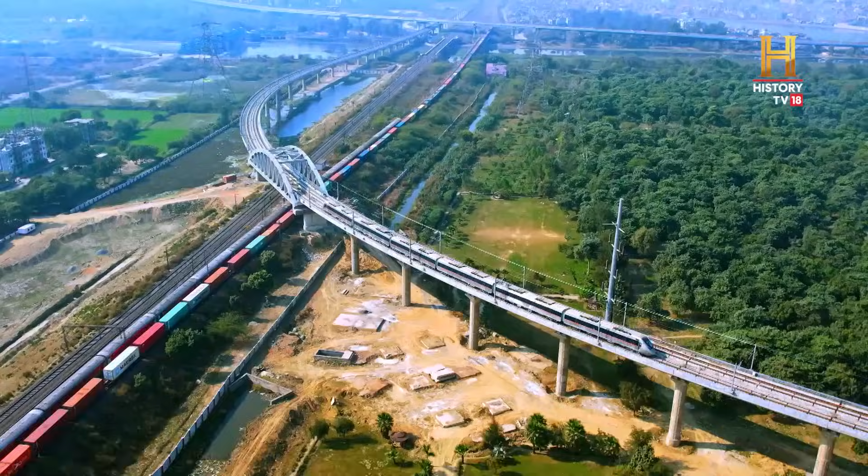India's first semi-high-speed regional rapid transit system, with a design speed of 180 kilometers per hour. An engineering spectacle passing through the densely populated national capital region, featuring world-class technology, new-age train sets, and a vision to modernize the way India travels.

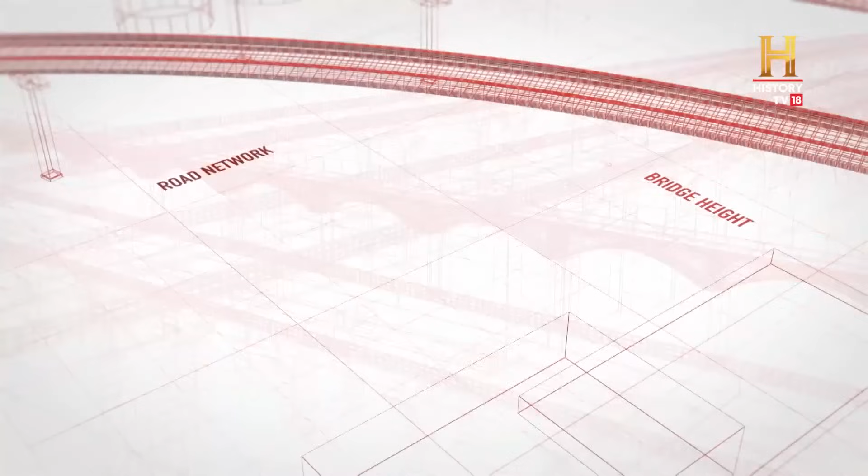Delhi, India's capital city. Standing in the heart of NCR, Delhi is a vibrant melting pot of dreams and growing aspirations.

This means that citizens from neighboring regions not only take up a tiring daily commute to the epicenter, but many have taken up residence here, swiftly adding to the congestion. The National Capital Region has a population of 46 million as per Census 2011 and is projected to become the most populous mega region in the world soon.

Can the region and the capital city handle the pressure of this escalating growth?

The idea of a National Capital Region was born in 1985 with an aim to allow the capital to breathe and spread out. NCR comprised of Delhi and parts of neighboring states. It's been 40 years and yet the struggle continued, primarily due to a lack of efficient regional connectivity.

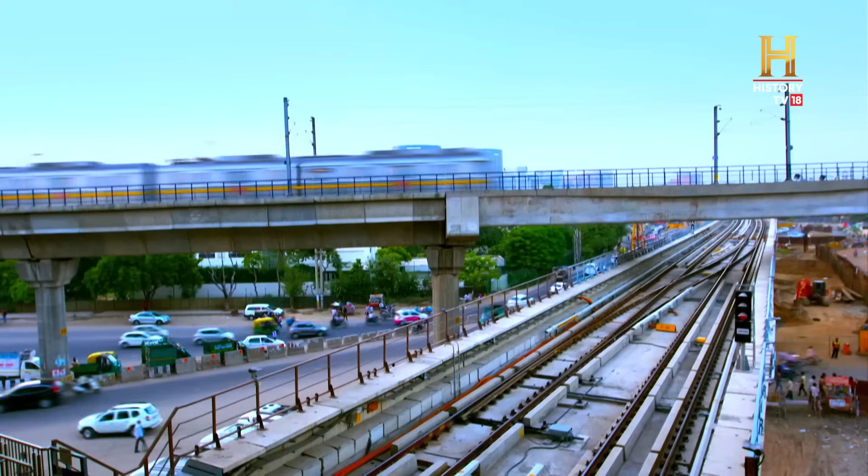An overburdened bus transit that has significantly contributed to noise and air pollution. A saturated rail network that is struggling to keep pace with the changing times. A modern metro service, but confined to the peripheries of the capital.

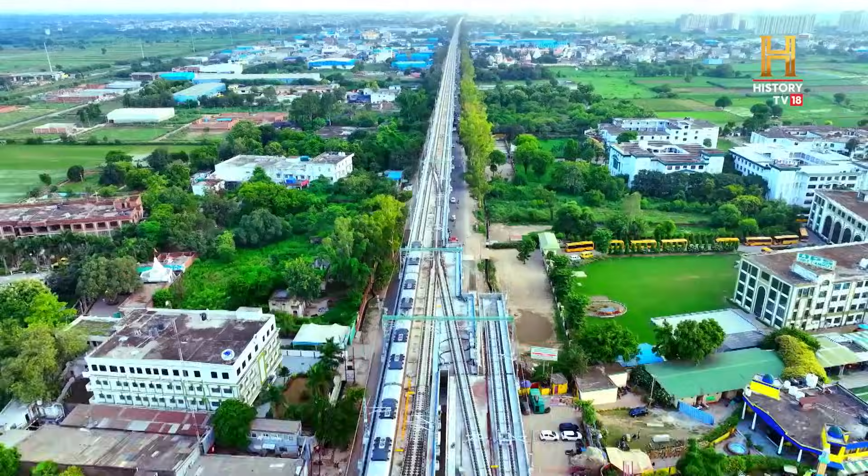The question that arises is what is it that can bind it all together, making life simpler for citizens from all around.

This started in the late 1990s, when the Ministry of Railways and Ministry of Urban Affairs came together to develop this regional railway system. A study was commissioned where RITES took the lead and developed a report to suggest the corridors and the expected ridership and other details regarding the feasibility of this project.

Formed in the year 2013, the National Capital Region Transport Corporation, or NCRTC, was set up to turn the dream of a futuristic, modern and reliable transit network into a reality.

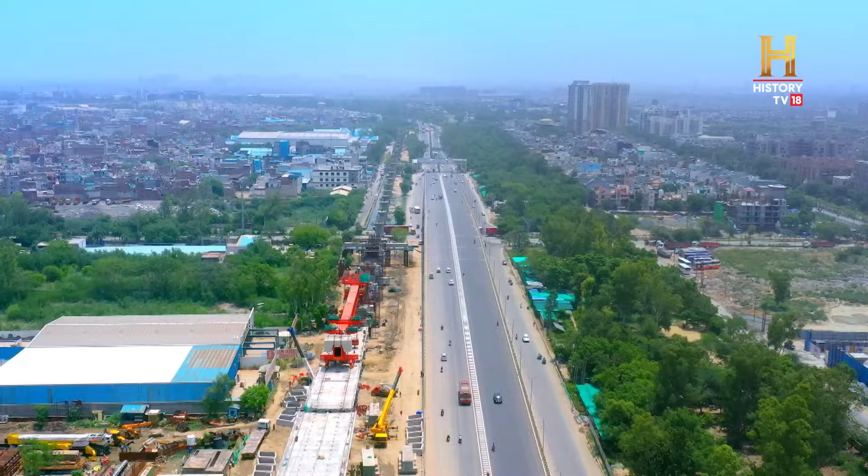Out of the 8 recommended RRTS corridors to connect the towns and cities in NCR with high-speed rail-based commuter transit services, 3 corridors were prioritized for Phase 1 implementation. The Delhi-Meerut corridor is the first one to have begun construction.

Densely populated and with round-the-clock traffic, construction on this corridor is the perfect example of a logistical nightmare. This has been observed across the world: when the public transport system, especially the rail-based ones, is safe, reliable, affordable and punctual, a lot of modal shift takes place from private vehicles to such systems.

We identified the risks involved in implementation of this mega project, and we systematically took actions to mitigate them one after another.

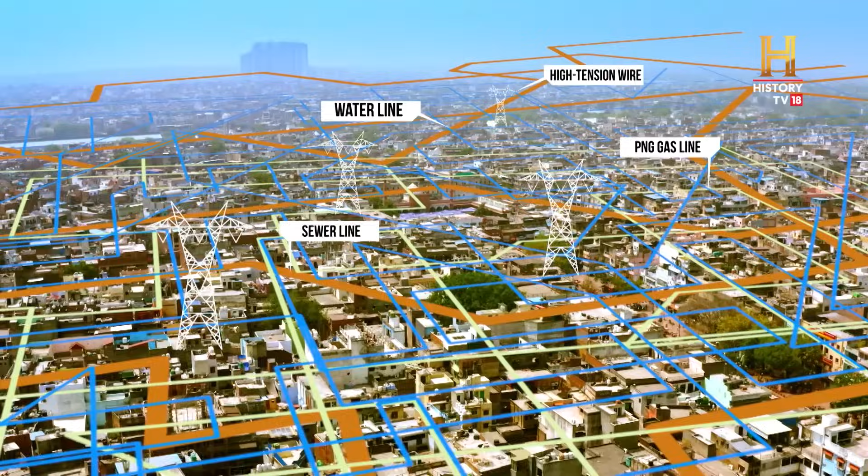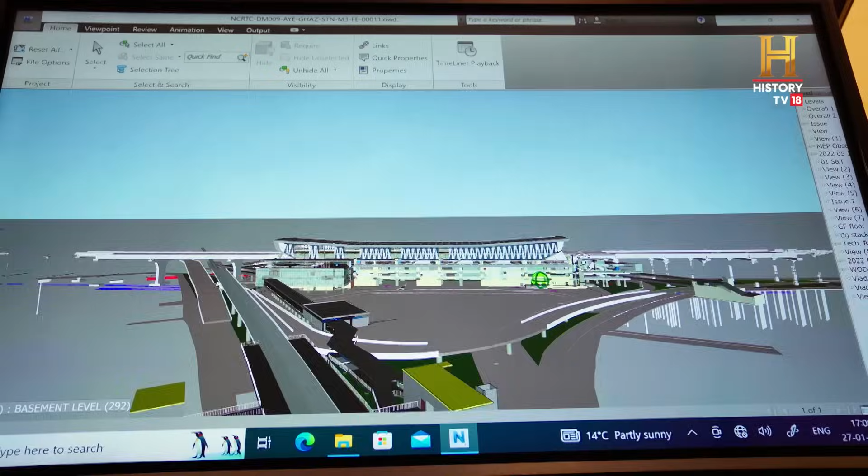Aerial surveys helped in route finalization. Major roadblocks were successfully identified. Shifting and upgrading the electrical lines, water pipelines, sewer lines and high power lines was carried out well in advance. 3D BIM models allowed easy implementation of design changes. Solutions were found and implemented.

Within just 3 months of the foundation stone being laid by the Honorable Prime Minister, construction commenced.

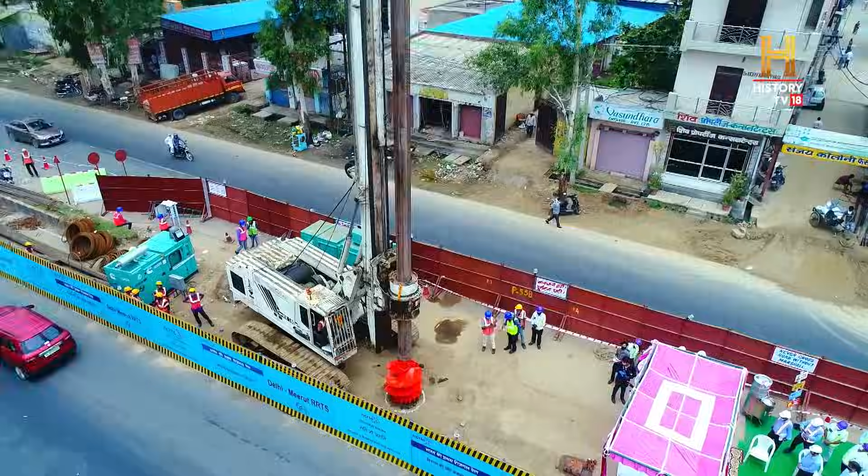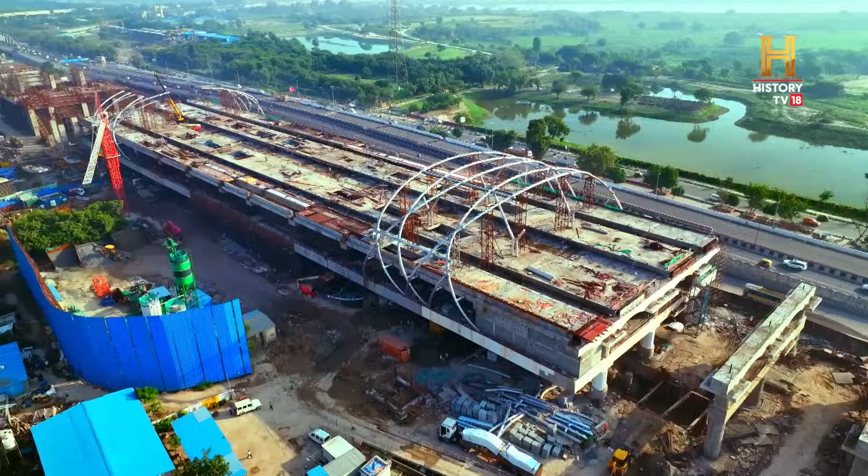A successful regional transit network is one which makes itself accessible to the people. The 3 priority RRTS corridors will converge at Sarai Kale Khan and be interoperable, enabling commuters to move from one corridor to another without changing trains.

The 82-kilometer-long Delhi-Meerut corridor will start at Sarai Kale Khan and will have a total of 16 RRTS stations ending at Modipuram, Meerut. An intelligent mix of 70 kilometers of elevated alignment and 12 kilometers of underground stretch will make for this state-of-the-art corridor. Further, Meerut metro services will also be provided on the RRTS infrastructure with 9 additional stations.

I'm very happy that Delhi-Meerut RRTS is reaching a critical stage in completion. Its multimodal connectivity with metro in Delhi and the NCR region, with buses, with other modes of transport, would provide a seamless movement for passengers within the NCR region and would set new standards in India.

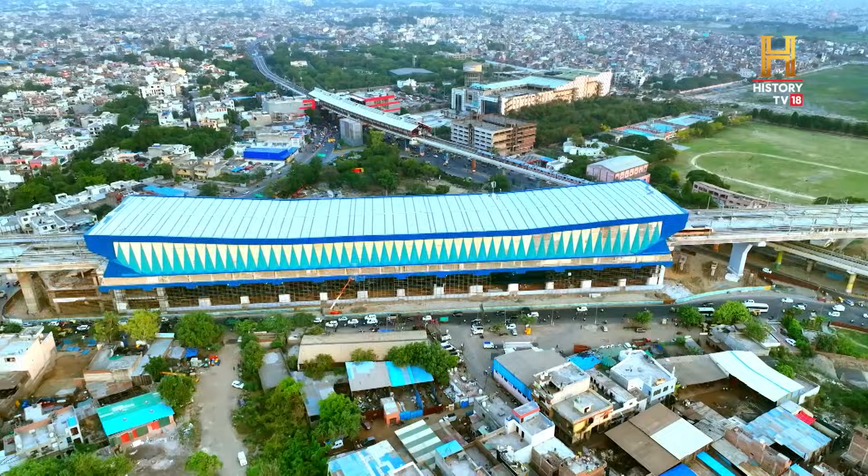RRTS stations have been located strategically close to the existing public transport systems to enable seamless multimodal integration. For example, constructed adjacent to the Anand Vihar metro station, the RRTS station will allow commuters easy access to both the pink and the blue line as well as the ISBT.

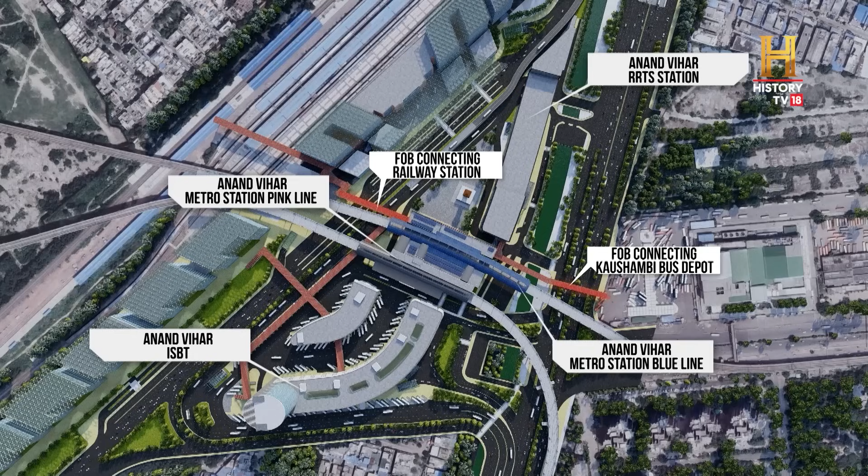Thanks to well-planned foot-over bridges, commuters will also seamlessly move towards the Anand Vihar railway station on one side and the Kaushambi bus adda on the other.

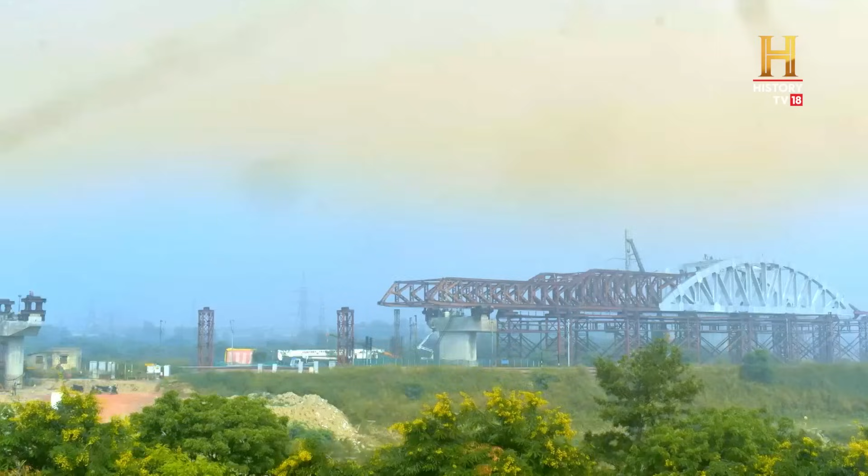Carefully crafted plans and with a skilled team, RRTS has been gradually turning itself into a shining example. ADB is very proud about the partnership with NCRTC, Government of India and state governments for setting out this modern, green and futuristic transport system.

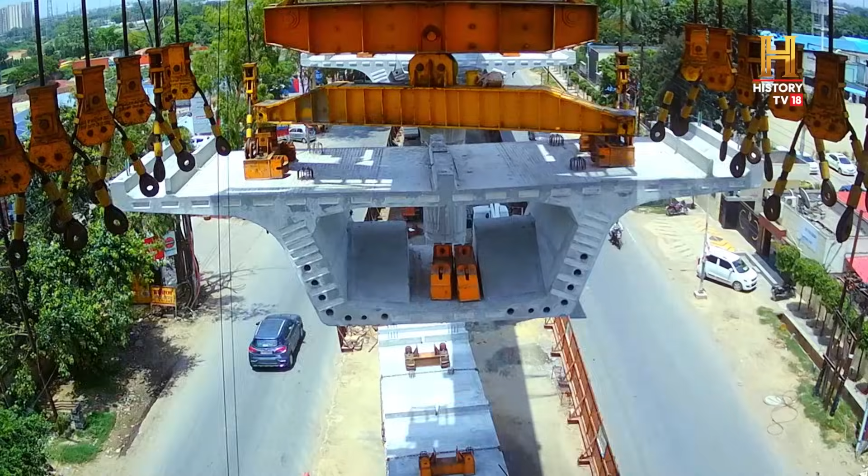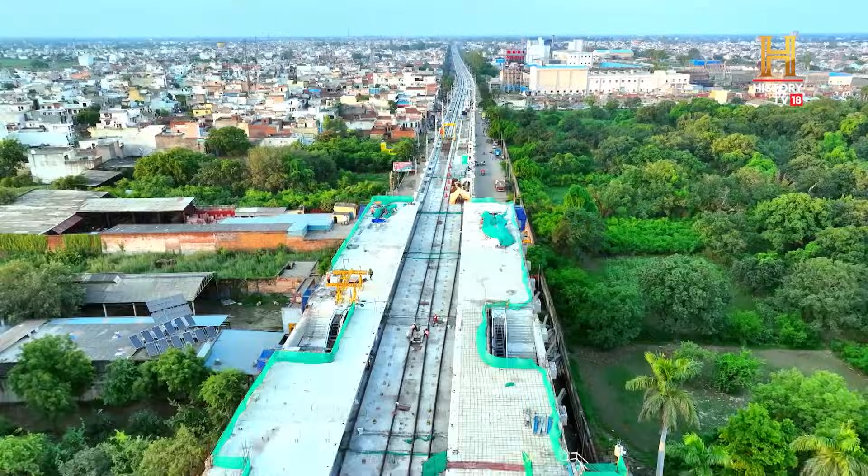This project provides millions of people in the national capital region access to better economic opportunities, especially women, thanks to high-speed RRTS. Once the designs were locked, came the construction phase. Across 70 kilometers, the alignment is mostly running through the middle of a congested highway. Crossing rivers and existing infrastructure, Team NCRTC is making headlines, overcoming numerous challenges.

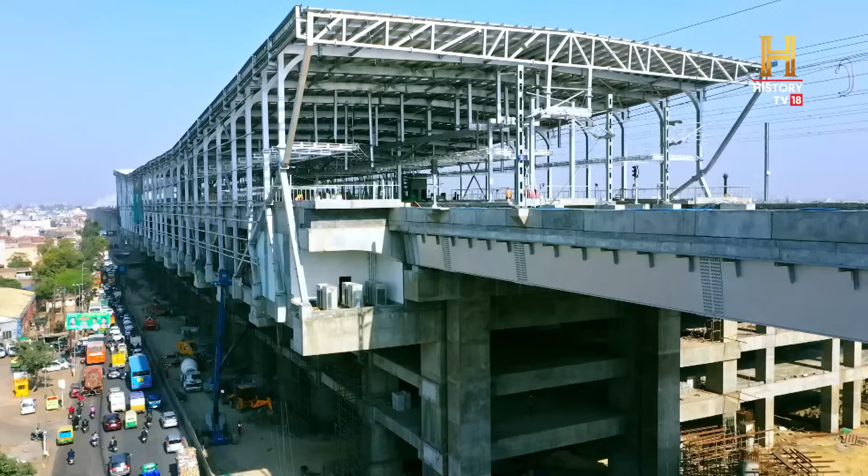The Ghaziabad RRTS station is a case in point. Constructed at a whopping height of 26 meters above ground, it is going to be the tallest station on this corridor. Building this station along one of the busiest roads on this route has been no easy feat.

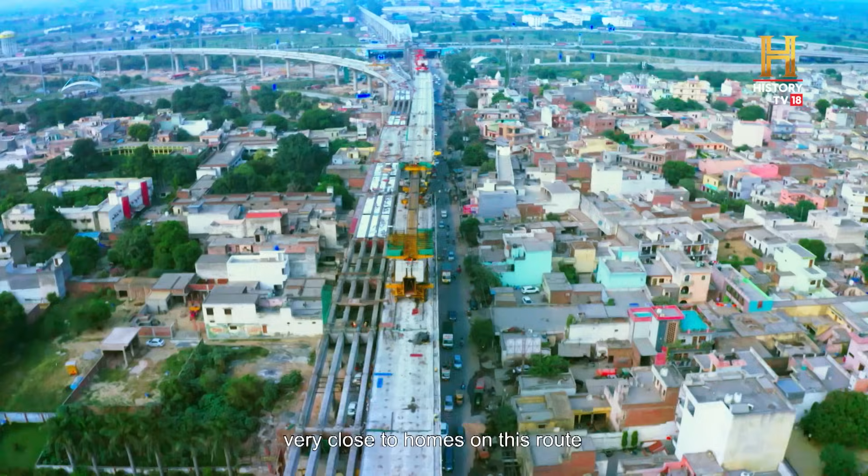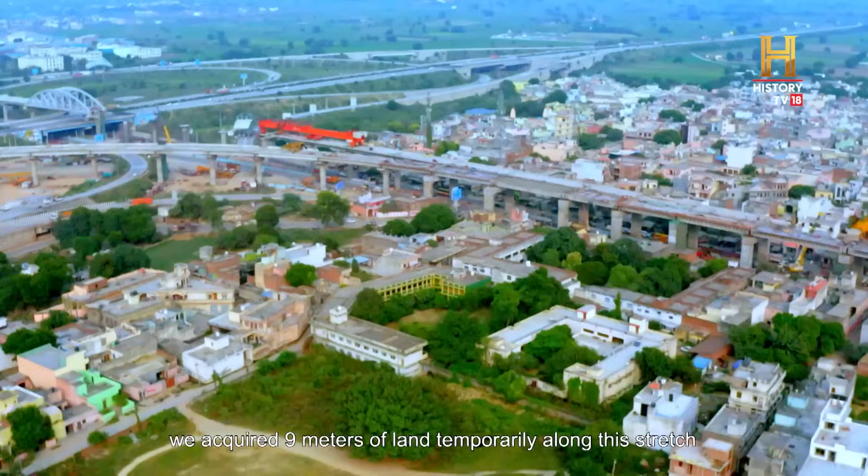Time was limited and quick planning the need of the hour.

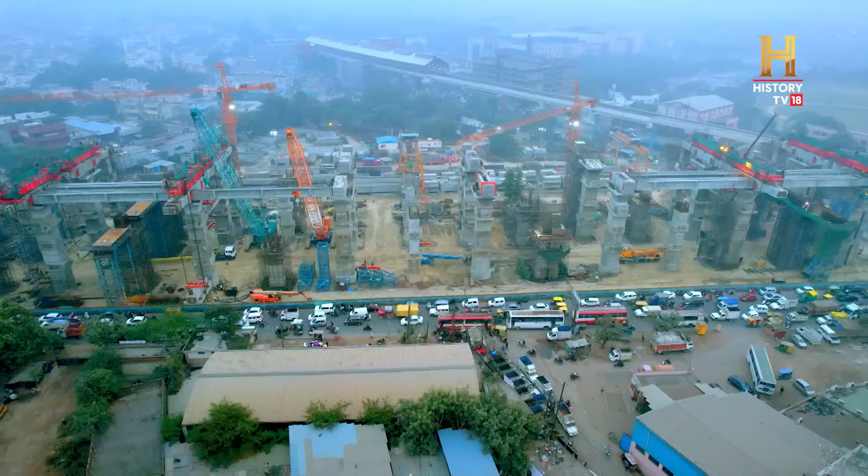Cranes carefully lifted loads weighing almost 100 tons to a height of 26 meters. This included prefabricated steel segments for installing special spans and precast slab tracks, each of these cranes weighing 550 tons each.

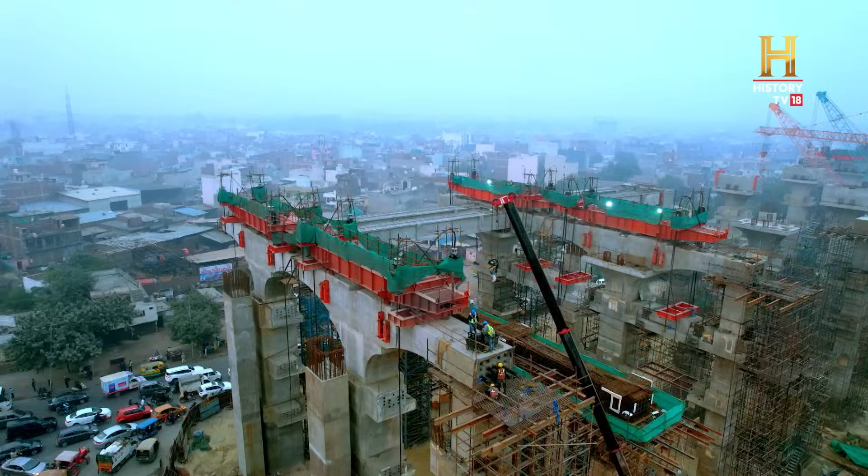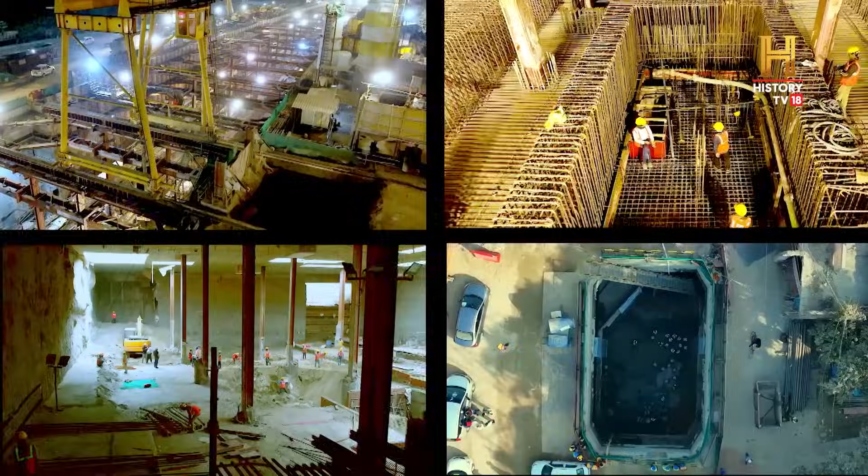While on one side, the elevated section has seen rapid progress despite its complexities, the corridor alignment is underground in congested areas of Delhi and Meerut, while tunneling work has its own set of challenges.

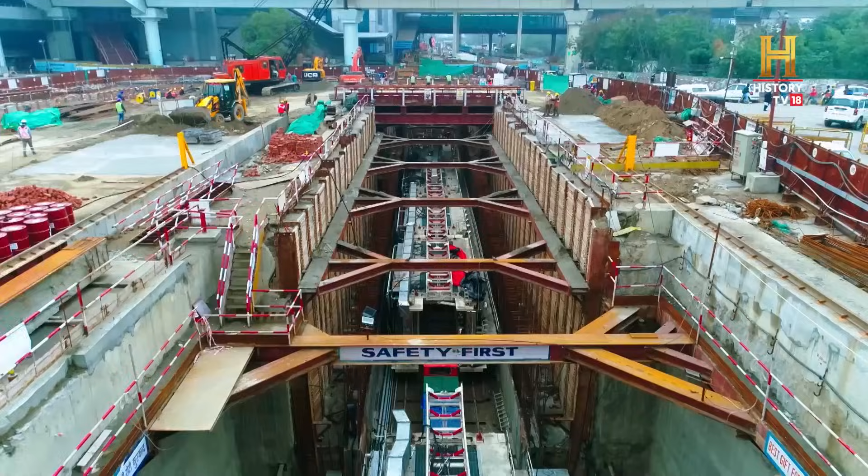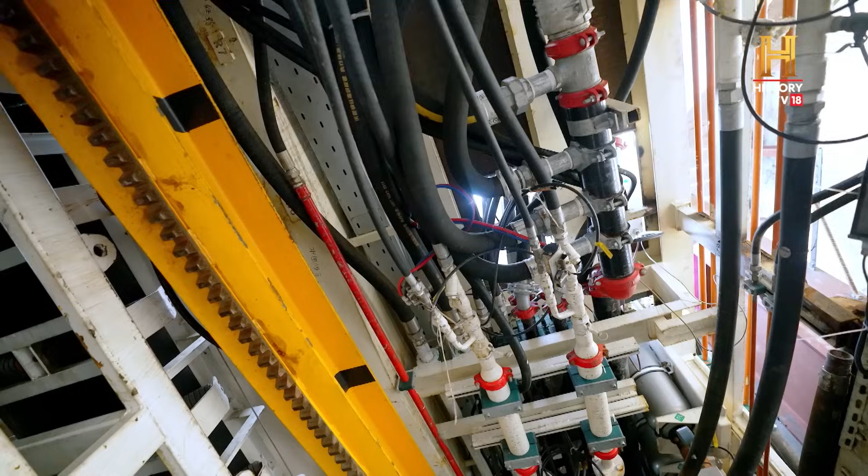To support an impressive design speed of 180 km per hour, a wider and higher rolling stock, the diameter of the RRTS tunnels is 6.5 meters. These are quite larger than the tunnels being constructed for urban transit systems in India and highly optimized as compared to the global benchmarks. Working through this maze demanded the use of the latest ultra-modern machines for the perfect job.

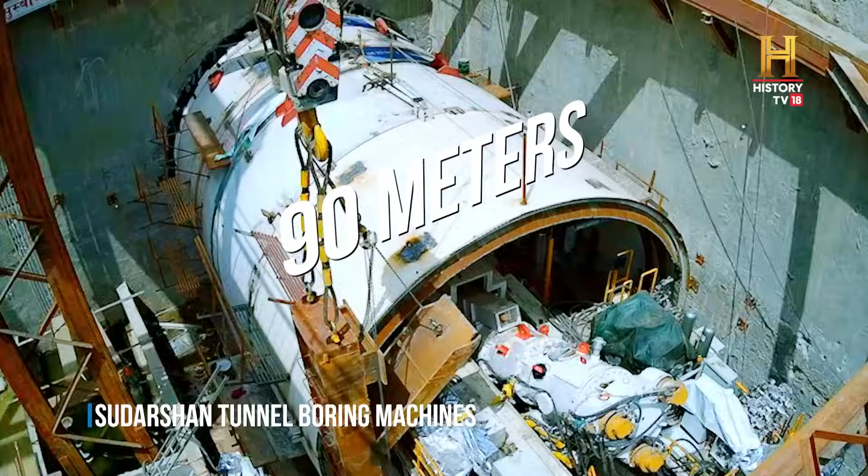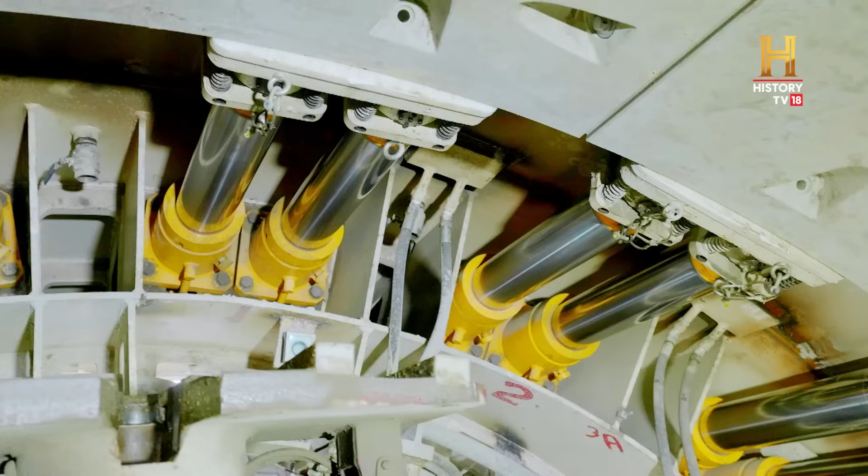And there it was, the Sudarshan tunnel boring machine. 90 meters long each, 7 of these highly automated, massive machines have been deployed to break through the tunnels. A powerful machine geared to turn this engineering vision into a reality.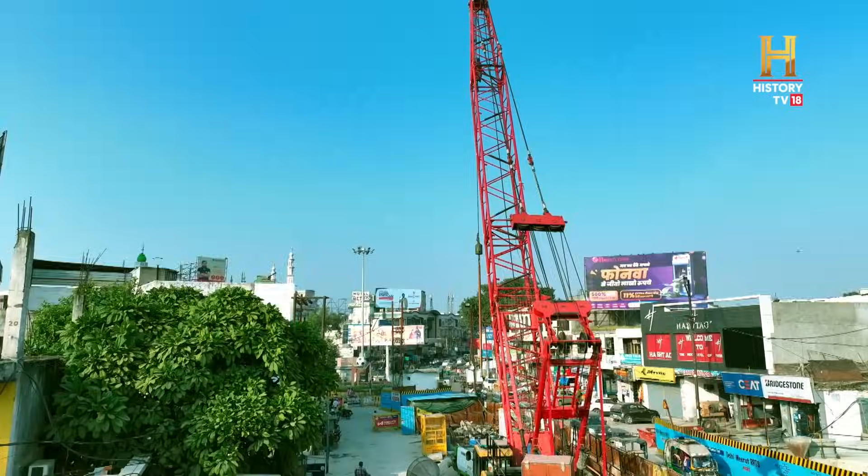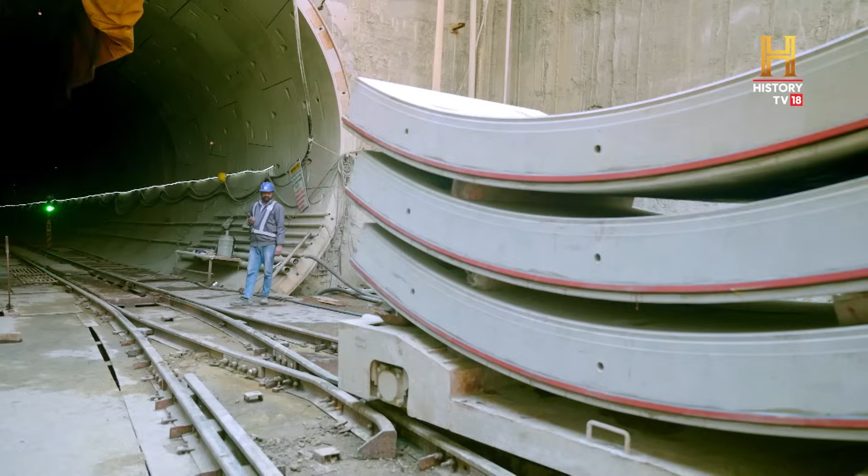Simultaneously, rings made up of 7 segments each are being precast at the casting yards and then placed by the Sudarshans to make the walls of the tunnels. More than 80,000 precast segments are being used to make these RRTS tunnels.

There were more roadblocks waiting to be defeated. Anand Vihar underground alignment crossing very close to the existing metro foundation is one such case.

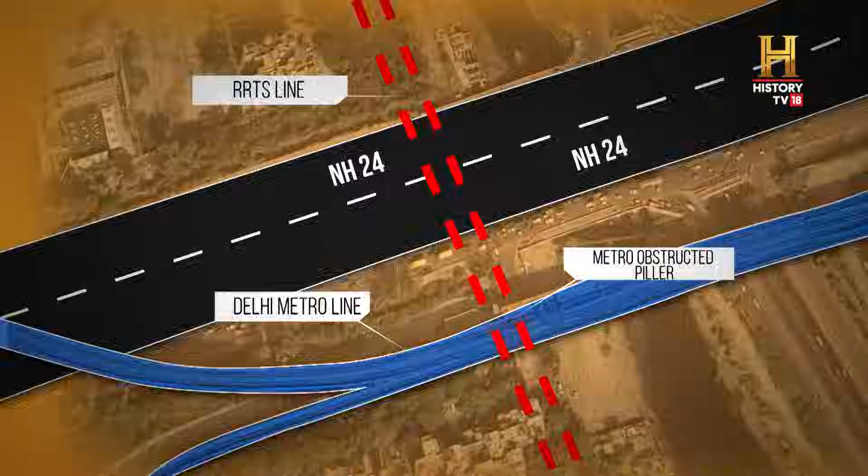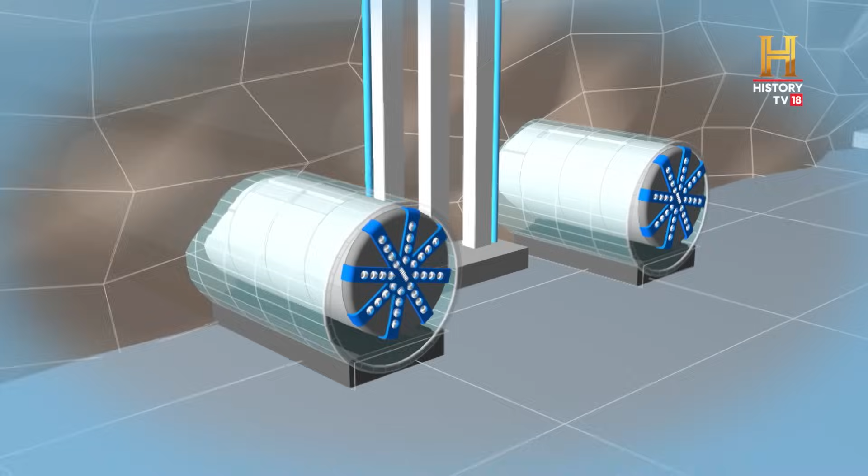The station design was suitably modified to make this possible. The result: the RRTS alignment has been constructed exactly under the basement of the existing Delhi metro station. The walls of the RRTS tunnel are at a distance of approximately 1 meter from the metro foundation.

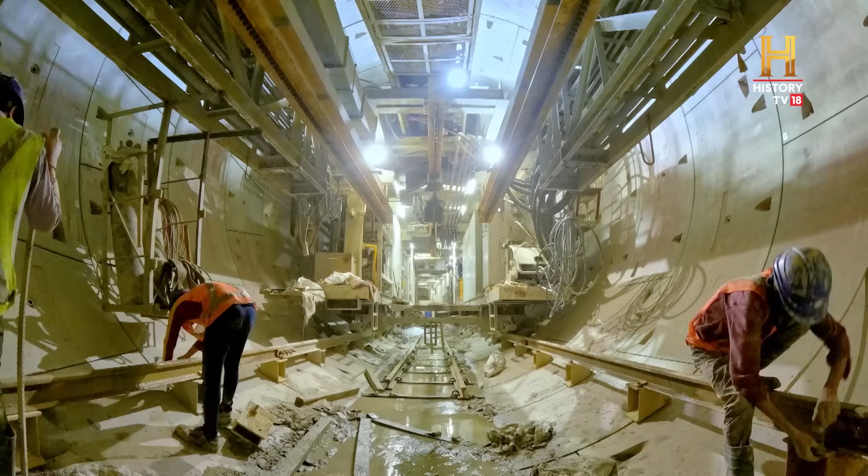A highly efficient team moving ahead of its deadline. The pace at which the project has taken shape has left many in the industry speechless.

This is the most prestigious project because it involves some of the latest technologies in the world. I am happy to note that in spite of COVID, the management has taken a number of steps to implement the projects on time. The project is on track, and when it is completed, that will be a historical milestone.

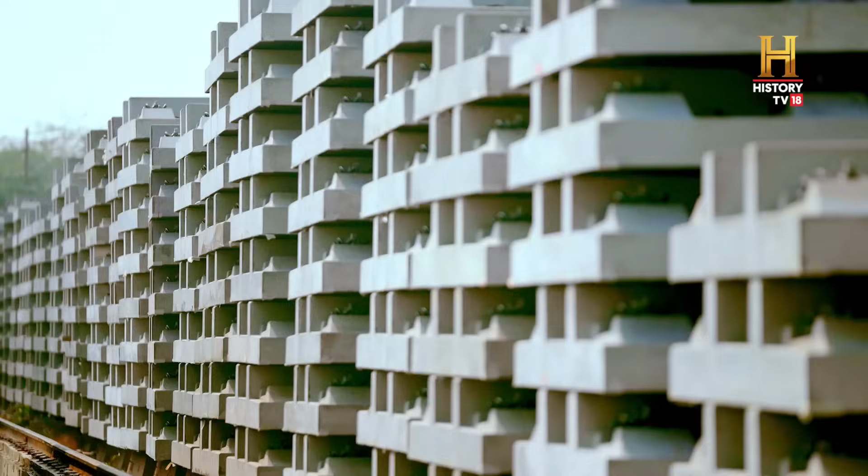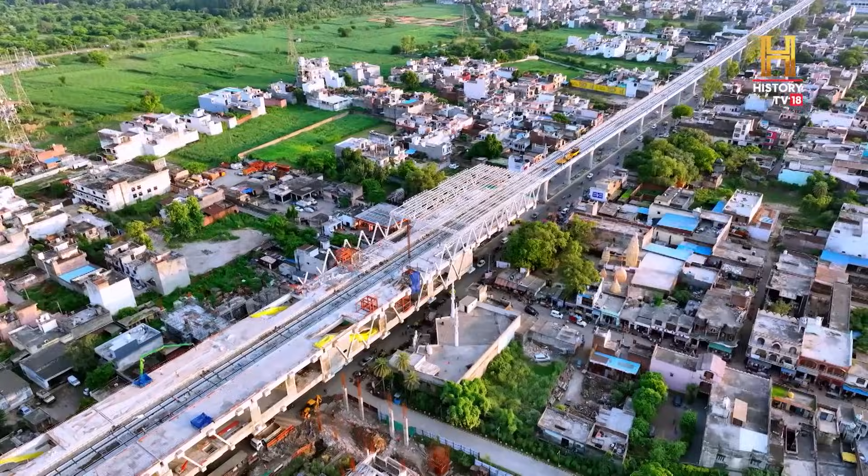Another unique technology being used in this first of its kind project is its precast ballastless slab tracks to support the design speed of 180 kilometers per hour. But what is this technology? Let's find out. Few kilometers away from Delhi, at the 45,000 square meters Meerut precast yard, this crucial element of the RRTS is being constructed.

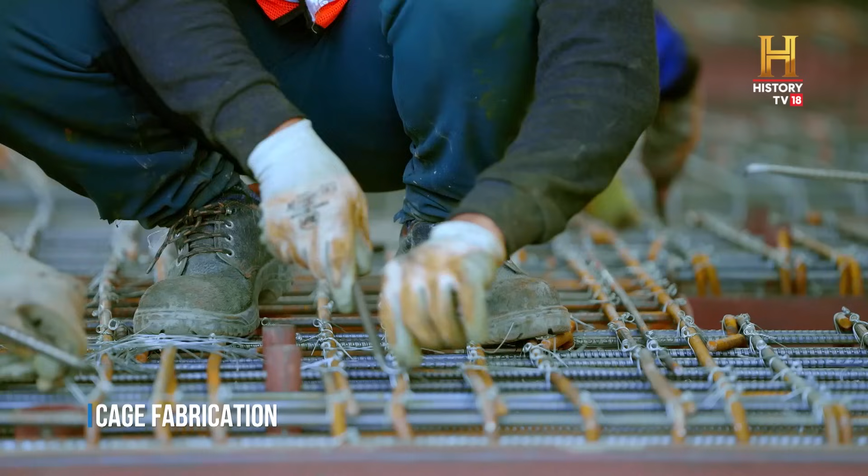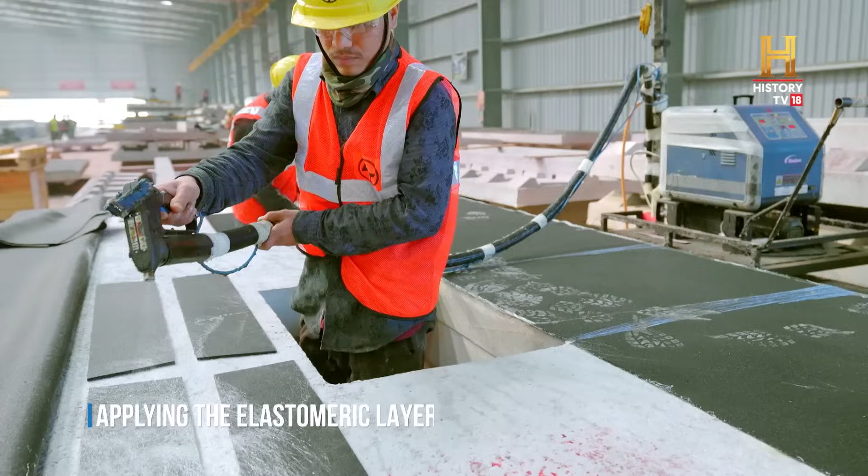Starting with a meticulous cage fabrication process. This includes cage placing, concreting, demolding, applying the curing compound, applying the elastomeric layer, turning the slab, and finally quality check.

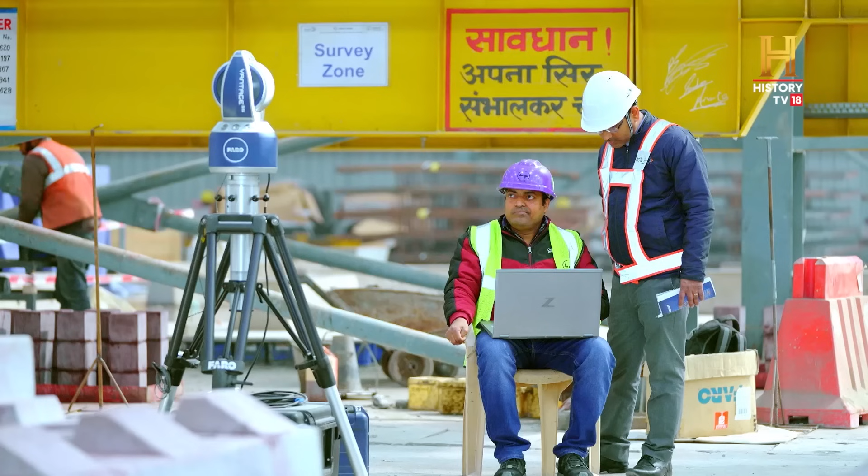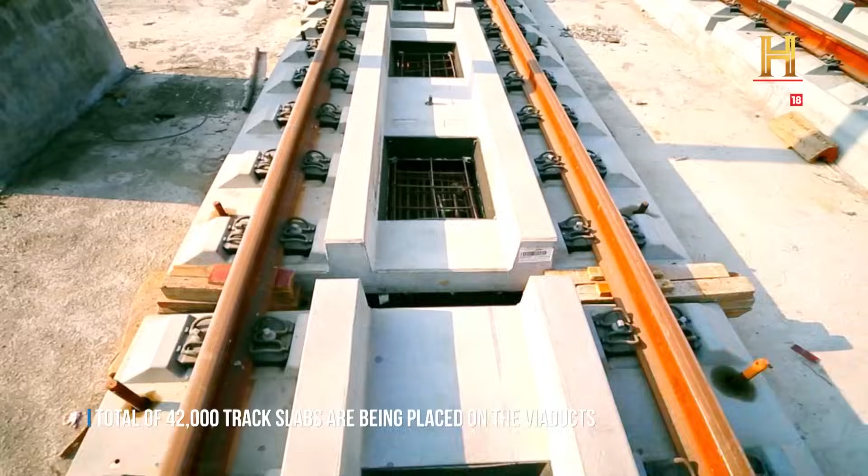Once at the construction site, these precast slabs are placed on the viaduct with utmost precision. These slabs are going to have minimal vibration and noise. These precast ballastless slab tracks will not only have a longer life cycle of 100 years, but will also require minimum maintenance.

It gives me so much of pride that a project which had been under planning for such a long time, but ultimately it saw the first light when the Honorable Prime Minister laid the foundation in March 2019. And from then on, the project has been running very rapidly, and one can see the kind of infrastructure which has come up from Delhi to Meerut.

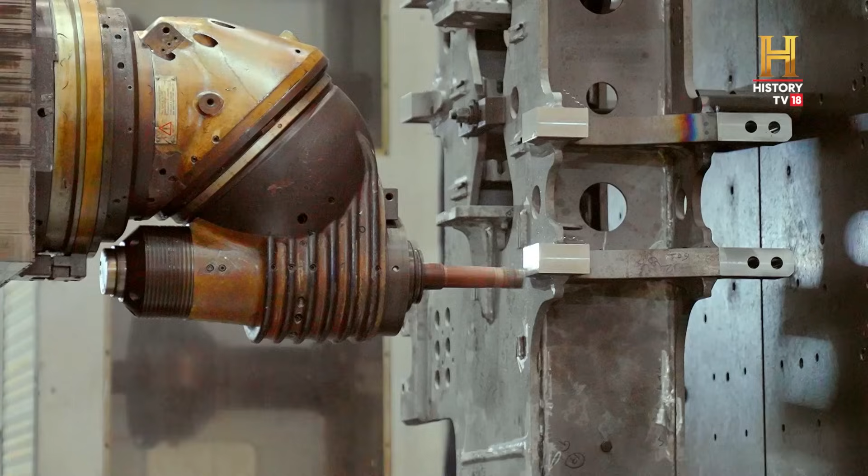Savli, 32 kilometers from Vadodara, is a facility manufacturing technologically advanced, world-class Namo Bharat train sets. It's the beginning of another busy day at the Savli facility.

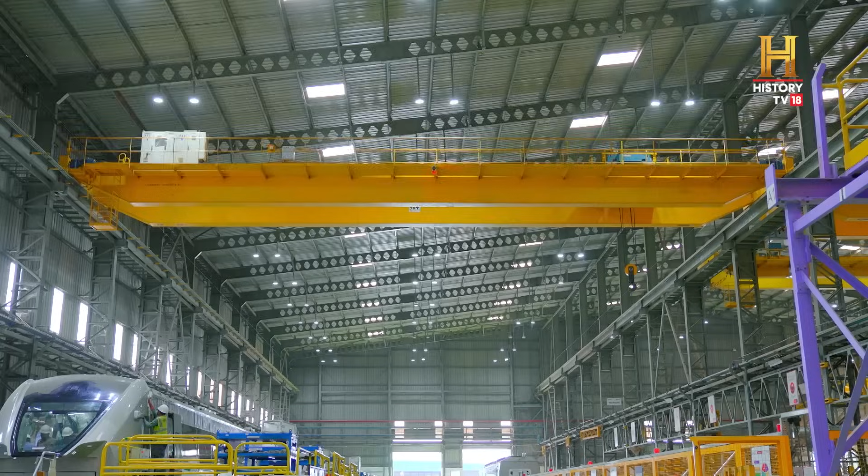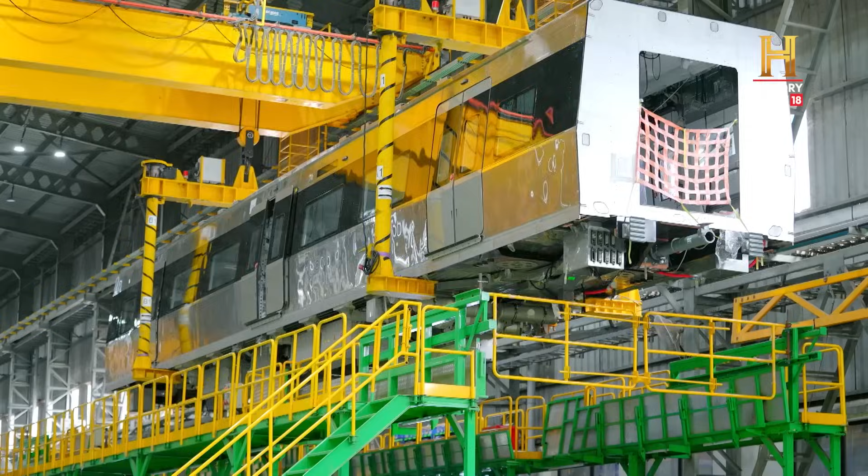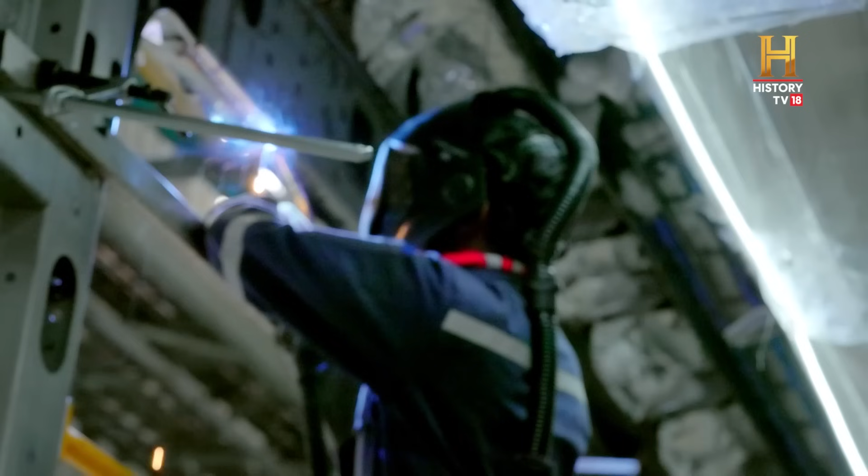Some heavy-duty lifting is in progress. A skeleton cover of new-age modern coach is being moved to the next stage. It takes a total of 60 minutes to finally place the massive cover on the floor. Slowly and carefully, the workers along with their supervisor make progress.

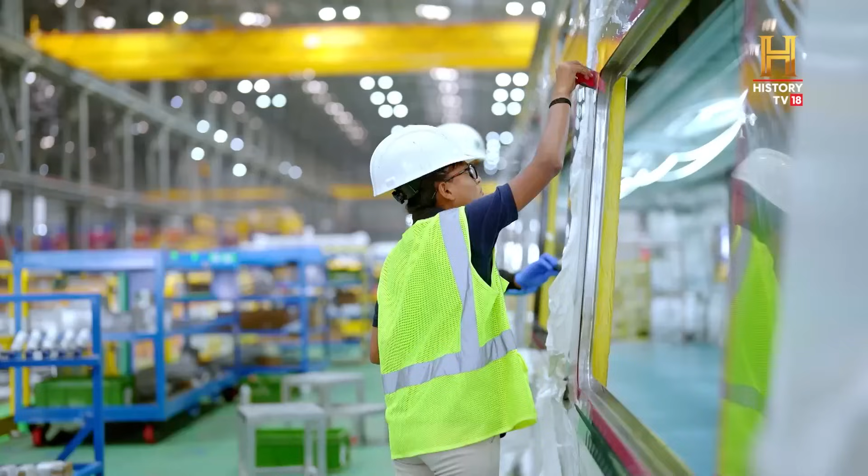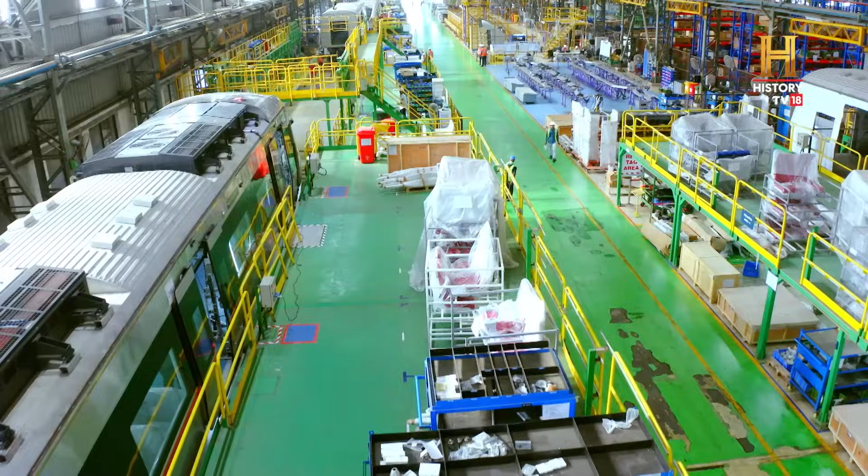These indigenously designed trains are futuristic and ready to run at a design speed of 180 kilometers. These Namo Bharat train coaches will offer state-of-the-art features, making every passenger's ride smooth and comfortable. Even though RRTS is a first-of-its-kind project being implemented in the country, it is largely being done under Make in India guidelines. 100% of its modern train sets are being designed and manufactured in India.

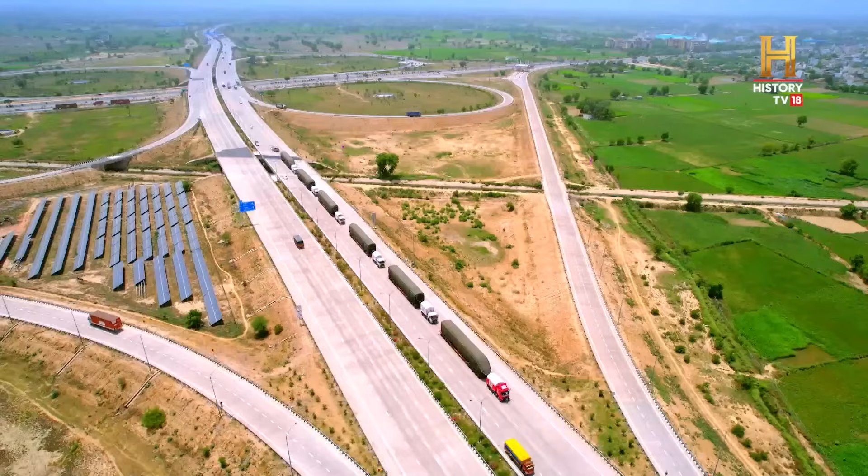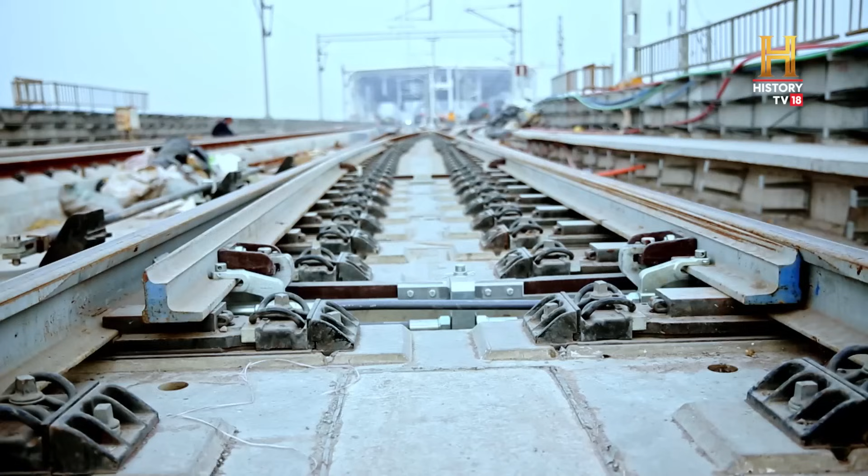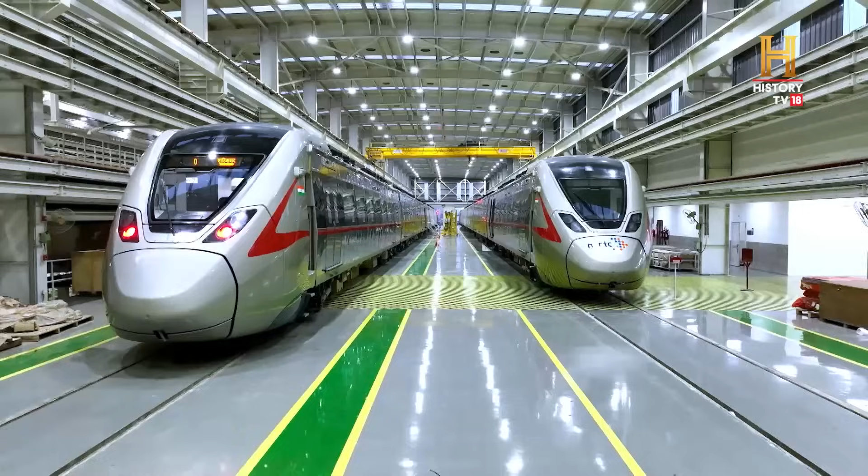Covering a distance of almost 1,000 kilometers, the Namo Bharat coaches arrive to get unveiled in NCR. The tracks in place and the stations nearing completion, it is time to roll the much-awaited Namo Bharat trains to serve the people. The team has worked long and hard and arrived at this moment. Years of intense hard work, a significant step towards a new, modern way of life. This is going to be their moment of truth.

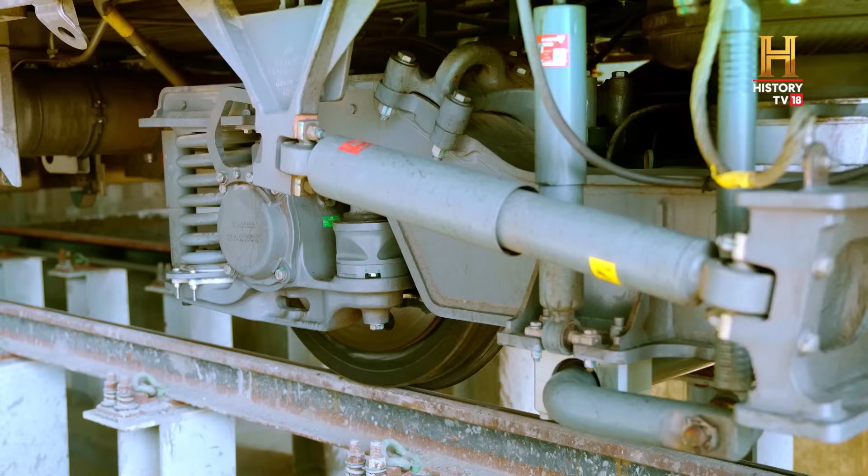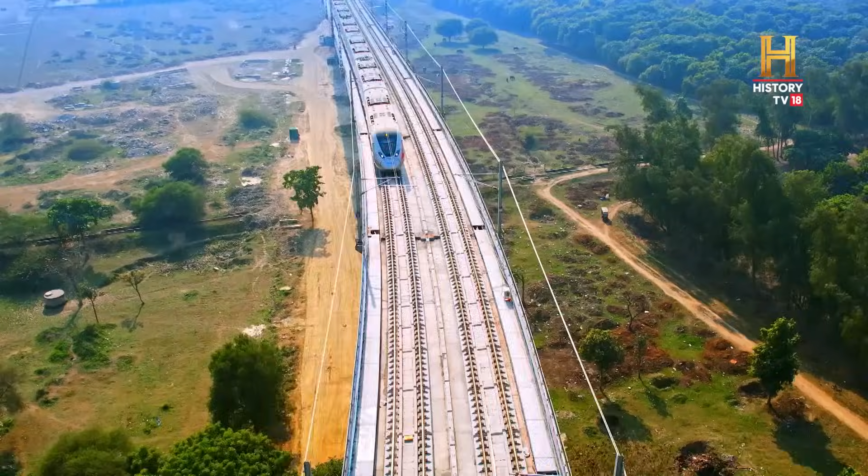India's first regional rail, the $4 billion RRTS project is going to be India's most ambitious infrastructure project in decades. This high-speed, high-capacity rail network will seamlessly connect the urban and semi-urban nodes of the National Capital Region, running at 180 kilometers per hour, beating the world-famous Crossrail of London that runs at 90 kilometers per hour, and France's pride, RER, with a design speed of 140 kilometers per hour. RRTS is marking India on the global map.

The Regional Rapid Transit System, RRTS, is a crucial component. This project is set to holistically improve the quality of life for millions of people, be it construction techniques, commuter amenities, or operations technology. Future projects will look upon the RRTS as a best practice both nationally and internationally.

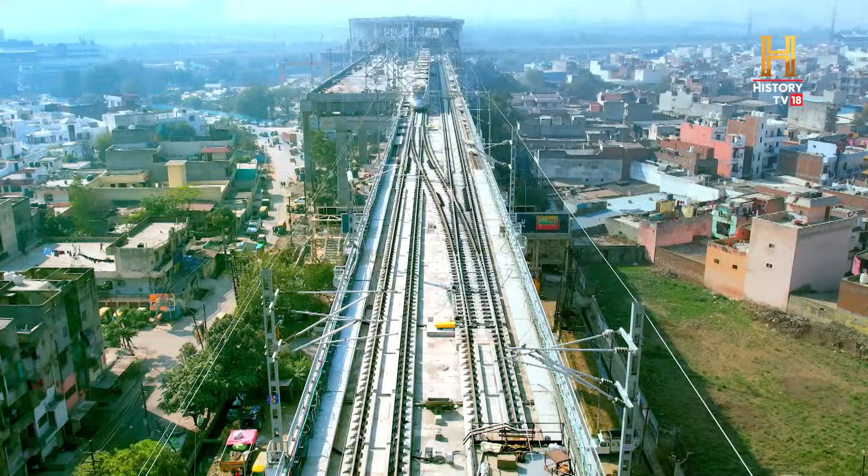In a recent study, the Centre for Science and Environment, CSE, revealed that vehicles contribute to more than 50% of Delhi's air pollution. And the vehicle numbers keep increasing. The worse the traffic, the more the level of carbon emission into the atmosphere.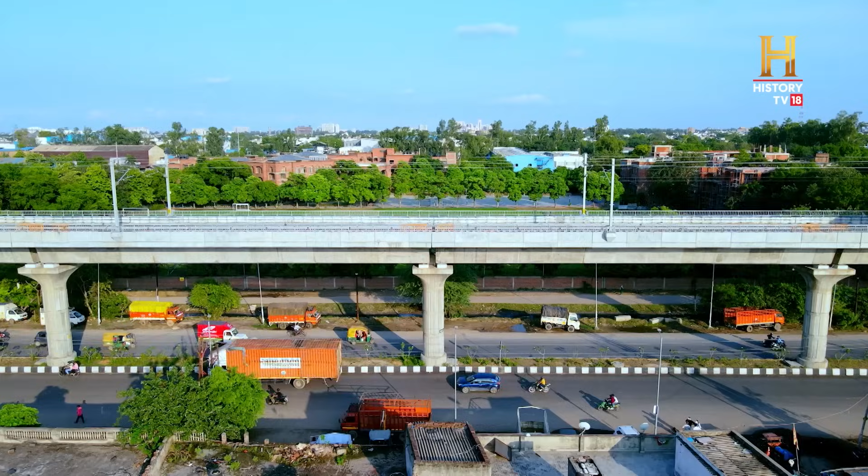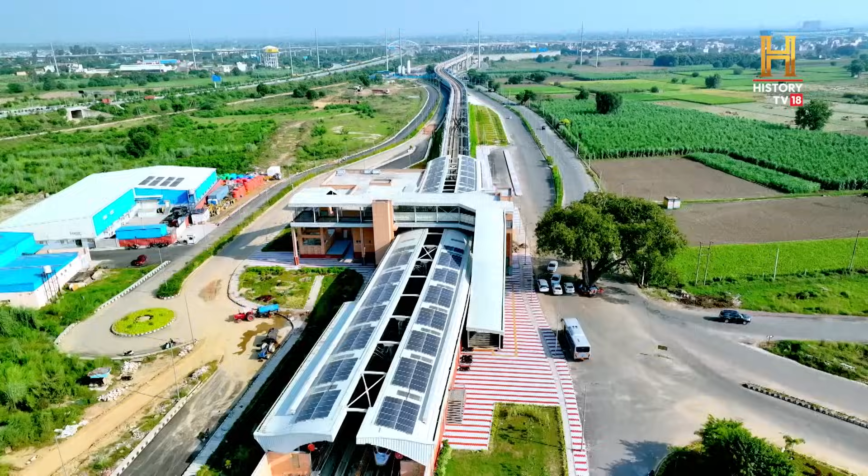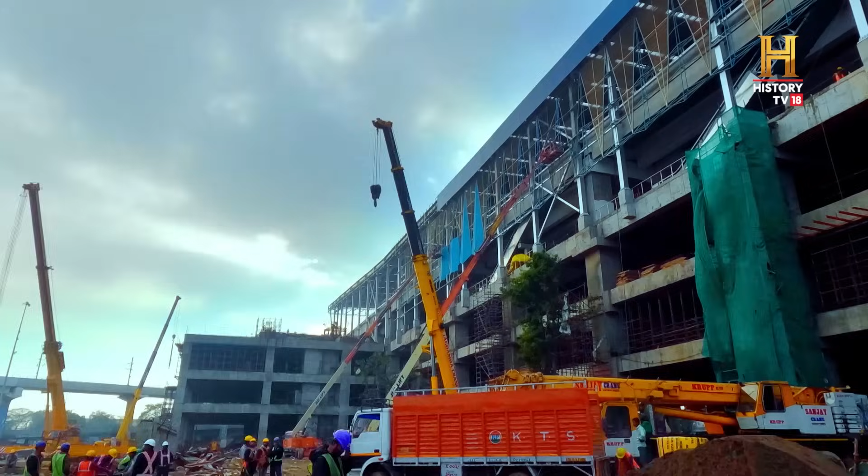NCRTC's vision of working towards a new India is also about creating a future that is sustainable and environment friendly. The consistent efforts to minimize air pollution at its construction sites is a case in point. The incredible pace, the successful collaboration of stakeholders and timely management have all come together with one common goal: building a new way of life for the people of the National Capital Region, one that is modern and eco-friendly.

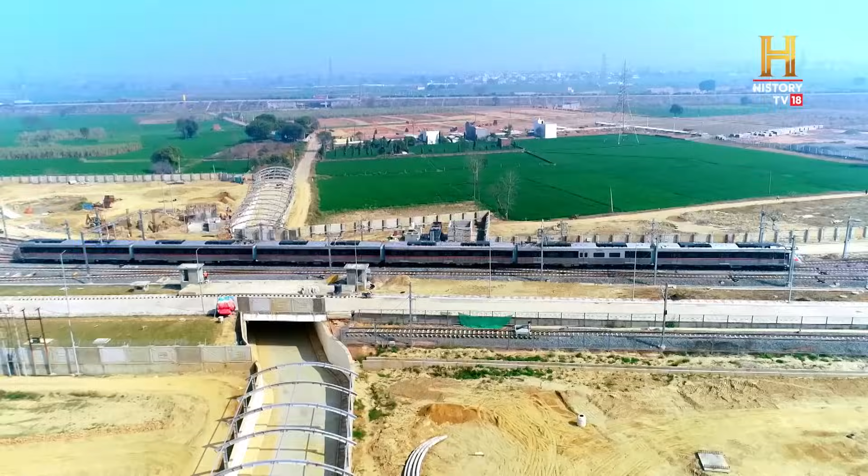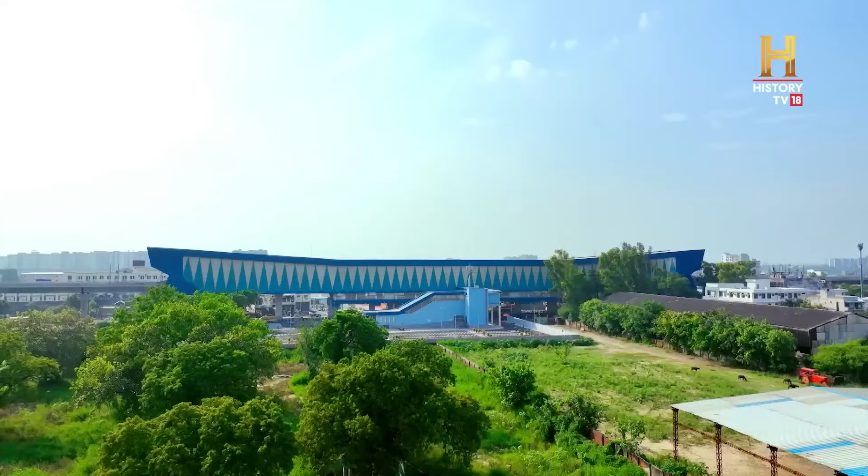With a projected daily ridership of 8 lakh, the Delhi-Ghaziabad-Meerut corridor will revolutionize regional transit. To successfully manage uninterrupted operation, NCRTC conducted dedicated training programs.

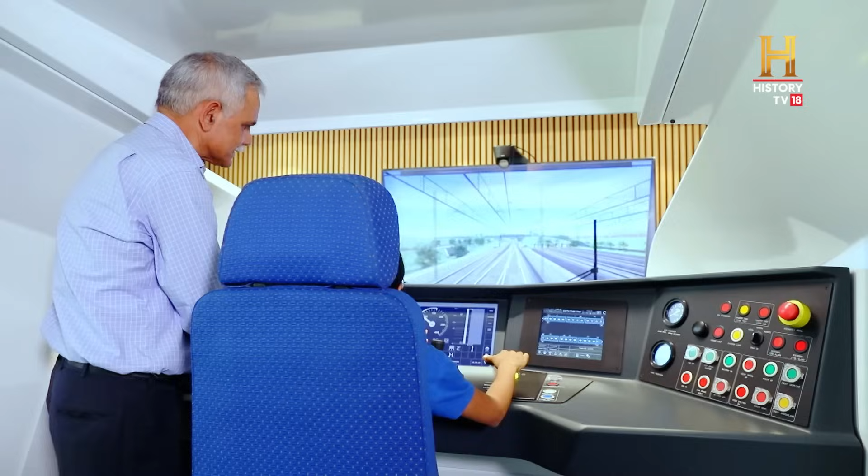Stations will be universally accessible. Platform screen doors for enhanced commuter safety. Round-the-clock CCTV supervision. The plan: a futuristic state-of-the-art rail network. The vision: a modernized system that will make travel easier, safer.

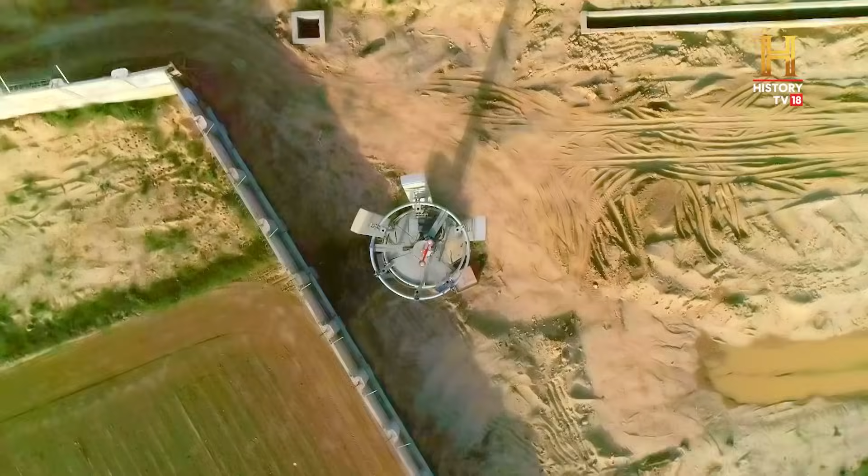RRTS will boast of a centralized operation control system, European Train Control System or ETCS Level 2 over LTE, being implemented for the first time ever globally. One of the most advanced signaling systems, this will allow trains to move seamlessly from one corridor to another with high frequency in all weather conditions.

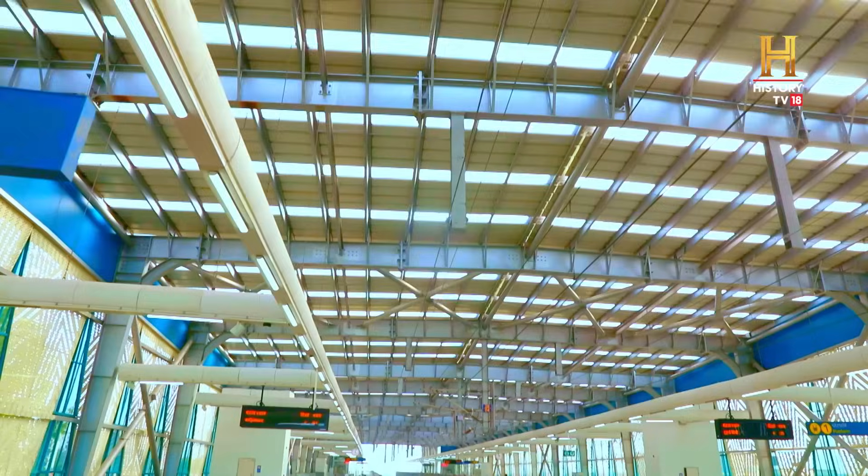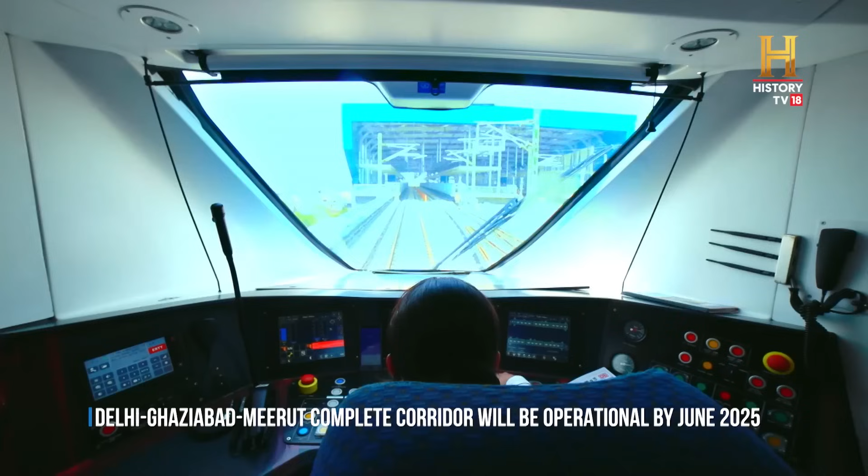Delhi-Ghaziabad-Meerut RRTS corridor will be the answer to many problems faced by daily travelers in the region. The 17-kilometer-long priority section was inaugurated by Prime Minister Narendra Modi on 20th October 2023.

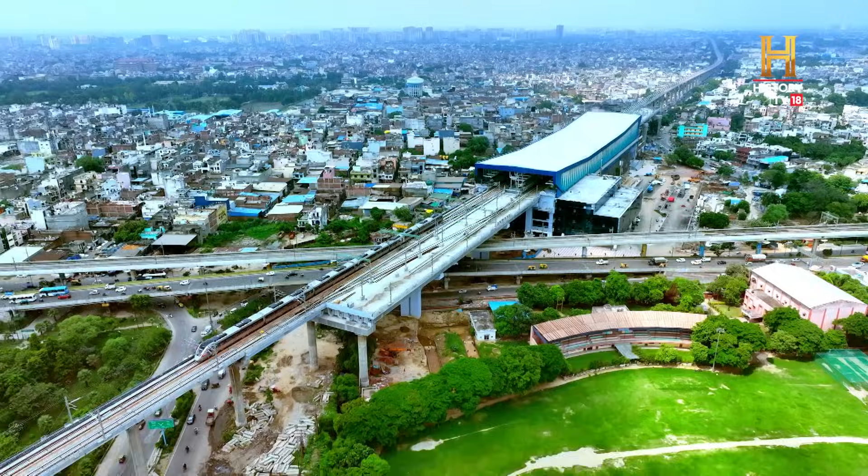Such modal shift and change in the centers of economic activity will help significantly decongest Delhi also. It will reduce the congestion on the roads and in the long term significantly reduce the pollution. This will lead to ease of doing business, this will lead to ease of living and significantly contribute in generating the employment and decentralization of economic activity.

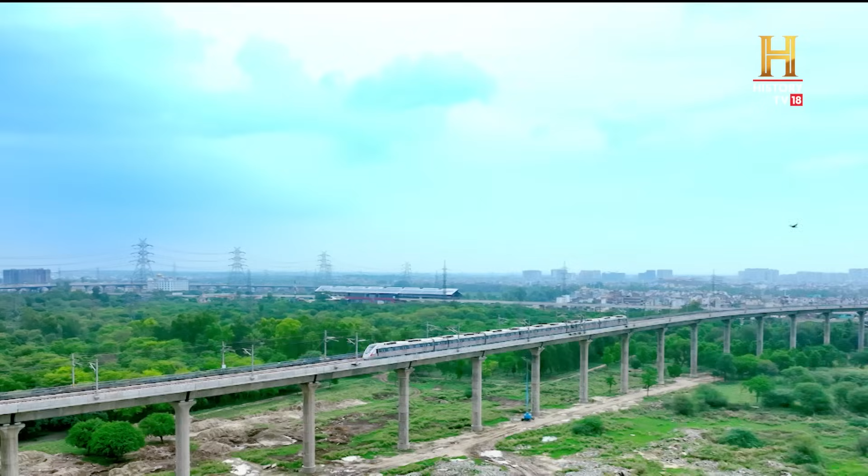India's first RRTS, with its world-class technology and state-of-the-art installations, is all set to charm the citizens of NCR. Seamlessly connecting major public transit modes, offering a fast, safe and reliable mobility solution. Bridging a significant development gap in the region's urbanization plan, RRTS is the future. And the future is here.